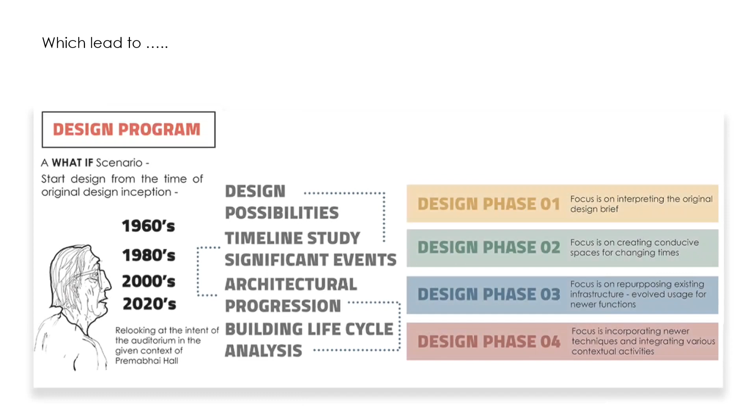This allowed a better understanding of the change that accompanied a built form, while questioning its relevance from time to time. The interventions thus planned are responses for the building to stay relevant and to sustain the changing times.

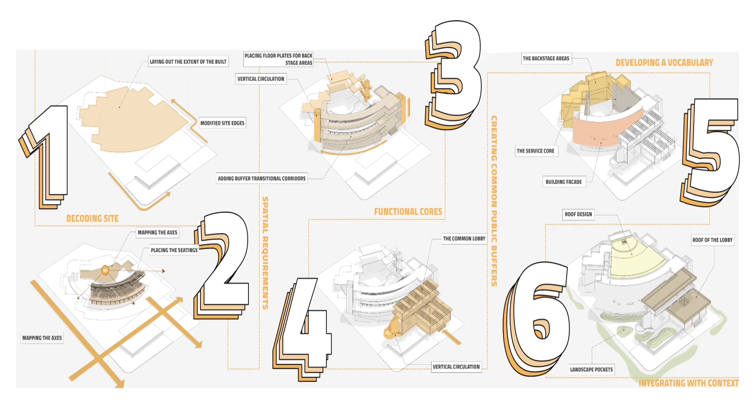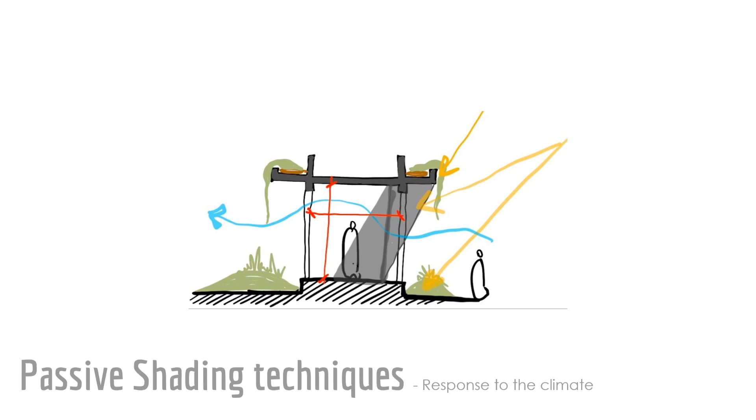Form follows climate. The building form is a response to its climate. The planning of the auditorium is done in a manner to respond to the climate as well as the changing times. Passive construction techniques, with a futuristic understanding of the change it may undergo, are used strategically for making the whole built form more responsive and adaptable.

The age of innovation aimed at building an identity, the age of increased demand aimed at accommodating density and trends, the age of heritage renewed the historical essence of the plaza, and the age of interpretation left scope for the futuristic growth of the precinct in a self-sustainable manner.

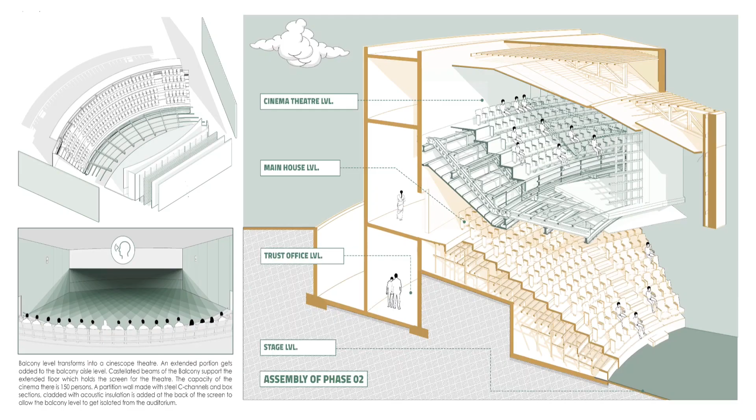Each phase adds on to the mapping of sustainability in the life of this built entity, thus allowing it to evolve. The thesis is not looking at this storyline as something that challenges the existing, but rather draws attention towards possibilities that could be explored.

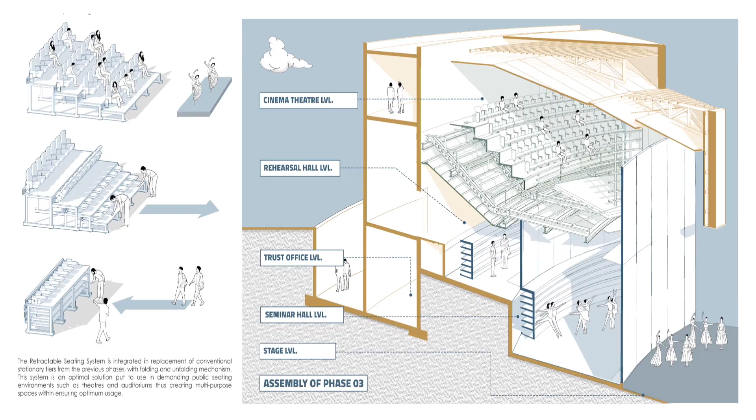However, phase 4 is not looked at as the end of the story, rather a milestone in the development of this plaza into a new age cultural hub woven around a built form and auditorium.

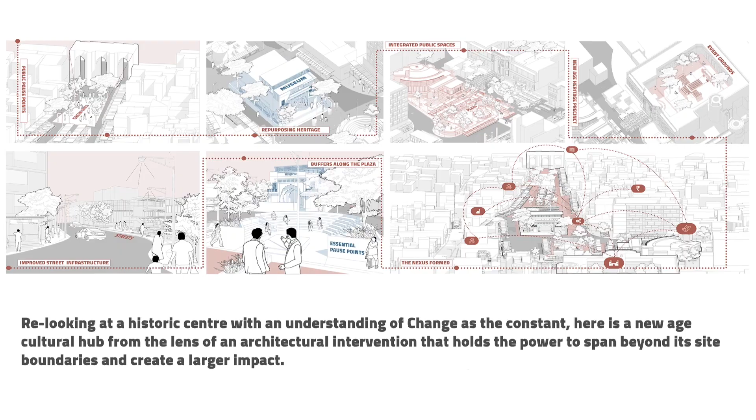The intention of the thesis never began from a climate sensitive approach, nor did it end at just that. Rather, it aimed and touched upon a larger picture where a sensitive design made more sense to achieve a sustainable model over time.